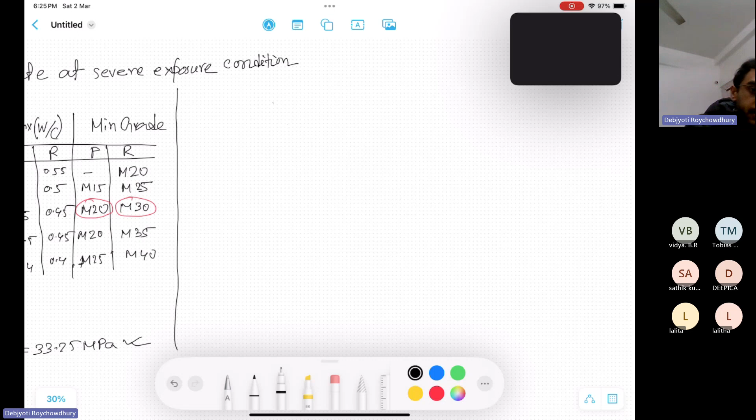So first we will try with the IS method, then we'll explore solving it through the ACI method. That is how I plan. In the beginning, we have to calculate the fly ash content and the new cement content. So first of all, what are the inputs we have? The inputs are 30% fly ash. I think I have to delete this.

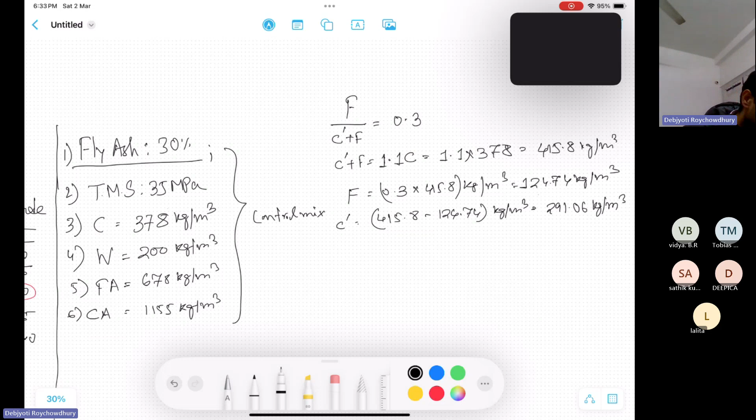So what will be the fly ash content? 0.3 into 415.8 kg per meter cube, which is 124.74 kg per meter cube. Okay, now C dash, the new cement content, what is it? 415.8 minus 124.74 kg per meter cube, which is 291.06 kg per meter cube. So this is the new cement content.

Now the water content. The cement content is there, now we will go for water content. What is the water content? Actually, the IS code mentions the water content based on the maximum size of aggregate. Considering the Indian scenario, MSA is either 20 or 10. So here we'll be going with MSA 20 mm and slump 80 mm as previous. And zone 3, the same zone. If you have seen Professor Bhattacharya's class, it is zone 3 they mentioned.

Then I'll proceed further. So first we got the fly ash content and also the new cement content. Now the water content is already there for the control mix. W is 200. And the slump is 80. Actually, in the previous section I think you have checked for 25 to 50 millimeter slump. Okay, the thing is already there. Yes, I have to tell this thing.

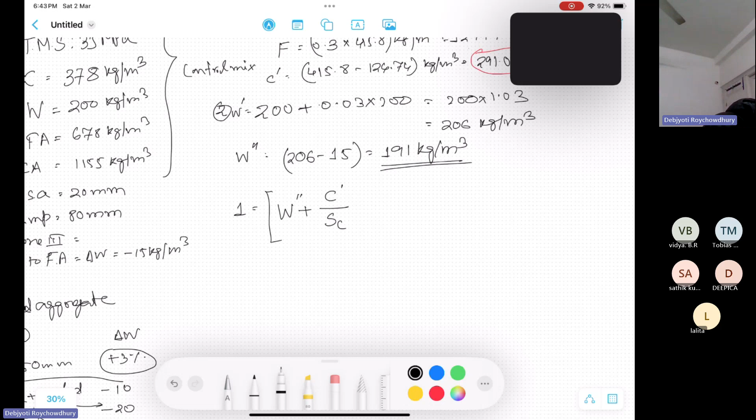So this is where I am. This is conservation of volume. Conservation of volume says that the total volume is 1, so 1 is the water content, W double dash, the corrected or modified water content, plus the modified cement content, C dash, by specific gravity of cement, plus fly ash content. Actually, in this conservation, there is no mention of the air content.

So air content is not included in this equation. So this is the cement content plus this fly ash content, divided by the specific gravity of fly ash, plus fine aggregate. So actually it is zone 3, right? So zone 3, it is about 0.64. I will tell you.

Yes, based on the maximum size of aggregate, what is the zone. So maximum size of aggregate is 10, 20, 40. Okay, same. And it is zone 4, zone 4 very fine, zone 3, zone 2, zone 1, and 0.5. Actually these are all volumes.

This is the volume of coarse aggregate by total aggregate volume. Okay, total aggregate volume. So 0.5, 0.66, 0.75, 0.48, 0.64, 0.73, 0.46, 0.62, 0.71. So 0.44,

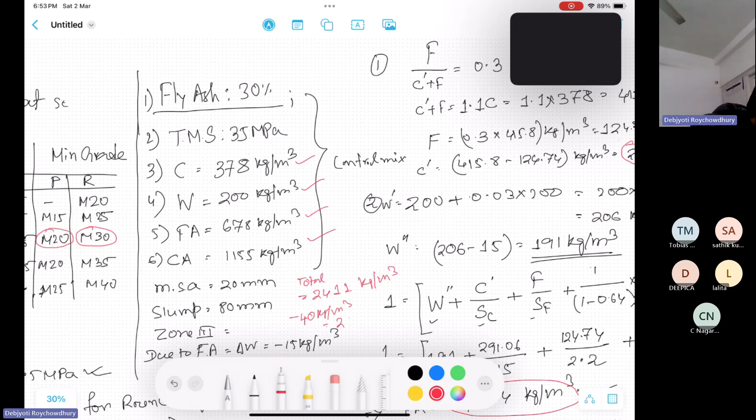So kg per meter cube is bulk density. Now they are saying that due to the addition of fly ash and reduction of water, the bulk density is reduced by 40 kg per meter cube. Okay, reduction in weight density, or bulk density, is by 40 kg per meter cube. It is coming around 2371 kg per meter cube. And you can check it with this, whether it is coming closer or not.

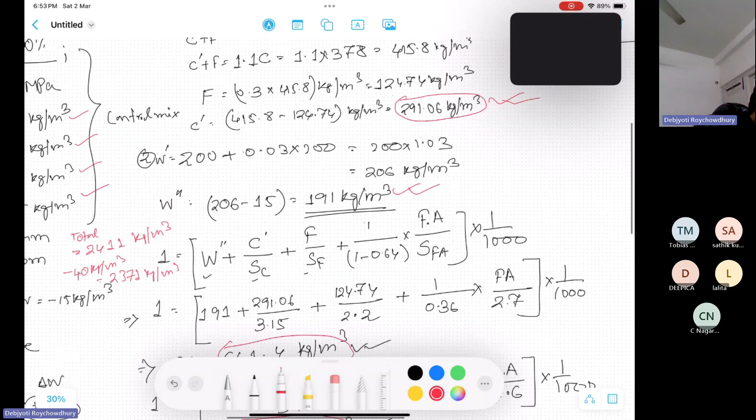So we have this cement content, this water content, and this fly ash content, because fly ash is added here, so fly ash should be included in the calculation. And this fine aggregate content, this coarse aggregate content. So fly ash content 124.74 plus cement content 291.06. This 124.74 is fly ash content, 291.06 is the new cement content. Water content is 191.

Now the fine aggregate content is 641.4, coarse aggregate content 1098.07. If you sum up, it is coming around 2346.27. So it is closest to this value 2371. So basically it is right.

Actually the information is not that compact, so we have to justify whether our calculation is correct or not, because I think this 40 kg per meter cube is not right. Actually this is the correct method of doing the calculation of all the components based on the IS method, because Professor Bhattacharya also stressed on this formula and conservation of volume. From the control mix, 40 kg per meter cube is reduced.

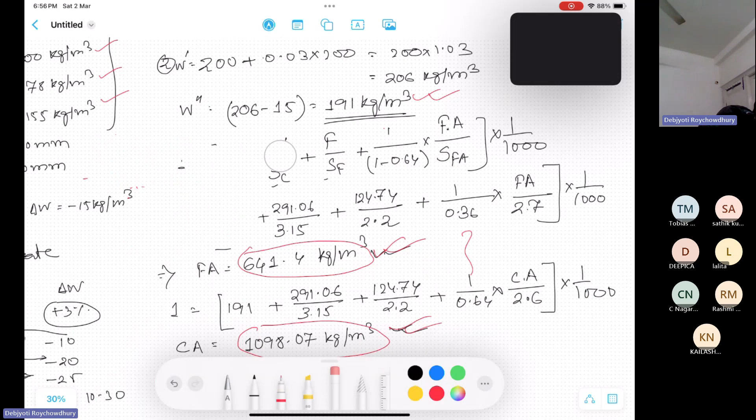Okay, now I'll do it by ACI method. So how would it be? You remember? Yes. What is happening?

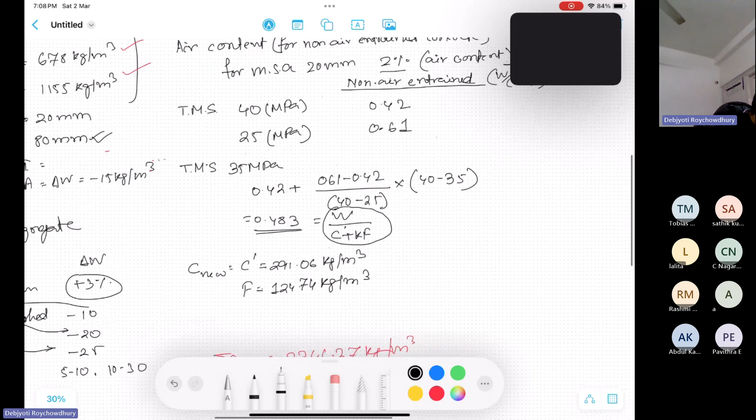So we have already calculated the water, the fly ash content and cement content from our previous calculation. The new cement content C dash is 291.06 kg per meter cube, and fly ash content is 124.74 kg per meter cube. Now the water content is there, so let's check whether it is matching or not.

So from here, water content is 185 by 0.483, so it is 383.02. This is cement plus kF.

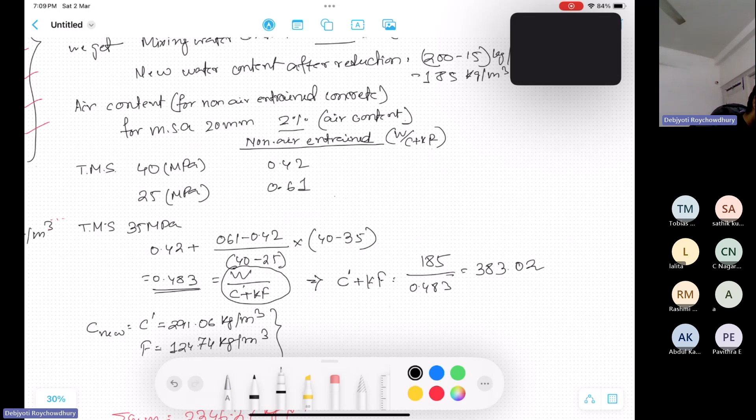So actually we already have the cement and fly ash content. 291.06 plus kF, where the k factor is mentioned as 0.3, so 291.06 plus 0.3 into 124.74, which comes to 328.482. Based on this formula, C plus kF is around 328.482 kg per meter cube.

However, here it is 383 based on the chart, while with the formula we are getting this. So you have to be careful about the methodology, because based on the methodology it can differ. Otherwise, you can simply follow our first calculations, where you can easily find out the fly ash content and all these things.

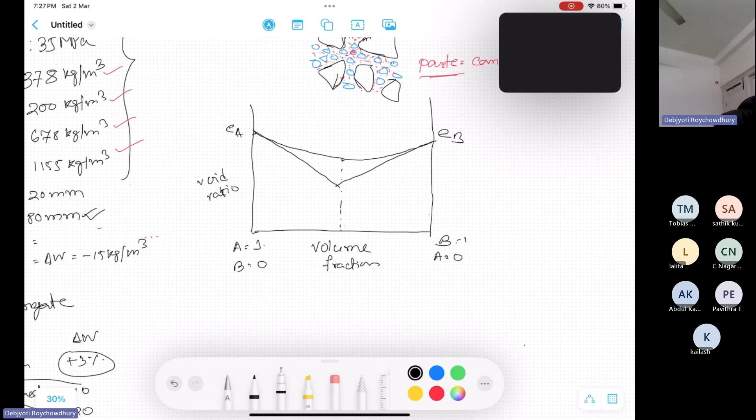So if the graph follows this way, with eA and eB, and there is a smooth transition, actually it can be mathematically calculated. With the smooth transition, at this volume fraction we can get the minimum void content. So this is the volume fraction of both A and B.

Corresponding to this graph, if we draw the packing density, packing density is here and volume fraction is here, A and B, and it's just opposite. So at the optimal volume fraction the void ratio is minimum, and at the same volume fraction the packing density is much more. So actually we can calculate this volume fraction and find out this packing density. The theoretical equations are there based on this to find out the packing density.

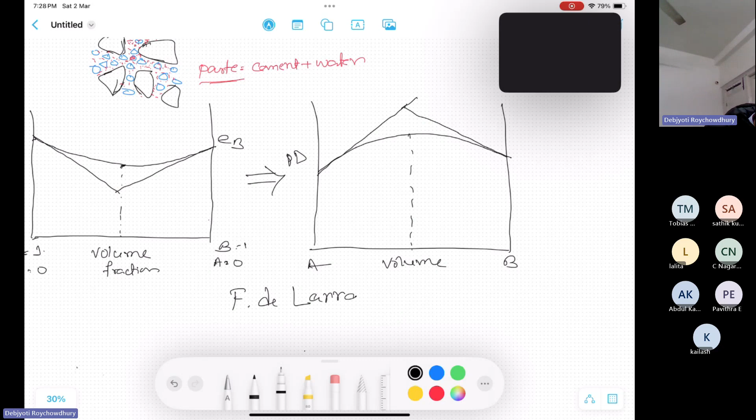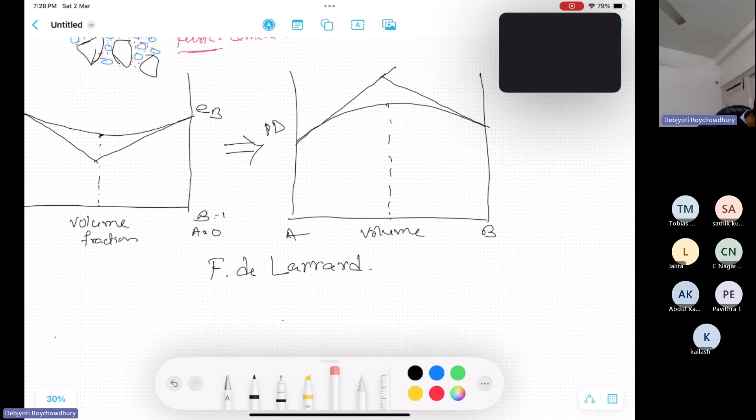One of the theories is led by F. de Larrard. Okay. So actually from a simple experiment you can do this. It is an empirical formula. From a simple experiment you can find out this packing density, which is a packed aggregate mixture in a defined proportion.

So it should be the mass proportion, because if it is a volume proportion, then it is very difficult to maintain the volume. A particular container has one particular volume, and whenever you are batching aggregate by volume and shake the container in a better way, the aggregate gets packed and compacted. However, when another person shakes it, the aggregate doesn't get packed, so it is in a loosened state.

And sometimes you have to trowel it above the top. In the previous cases it doesn't happen, so you will be getting different masses of aggregate for the same volume. So the volume proportion is much more difficult to control. However, the mass proportion you can easily control, because we just weigh the mass. So it is within our reach to control this mass proportion.

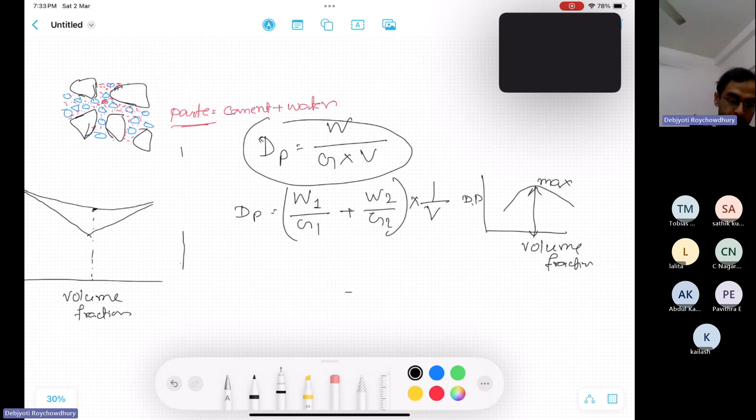Now packing density is done. So you got the maximum packing density, and based on the packing density you will get the minimum void content. So minimum void content is nothing but, yes, based on the packing density.

Yes, so the void will be 1 minus dp max. Actually there is also the effect of density. If you get the void from the density alone, it will be much less. However, the void will be much more because of the wall effect and loosening effect. The wall effect you already know; we discussed it in our previous class.

First of all, the loosening effect: whenever you add fine particles or paste inside the aggregate system, it will disperse the aggregate system. And also due to the wall effect, at the boundary, the fine aggregate arrangement gets disturbed, so dispersion also takes place. It is found that 3 to 10% of dispersion takes place in the cement paste or aggregate system due to the wall effect and the loosening effect.

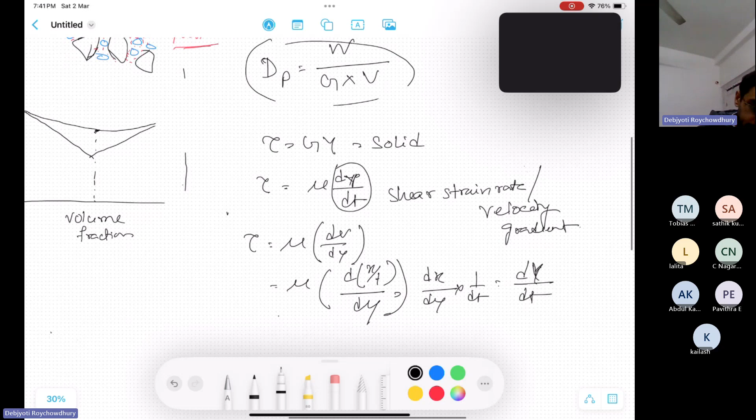Okay, so dx by dy is nothing but shear strain. So it is d gamma by dt. So it is a shear strain. So actually it follows Newton's law. So in the plastic state, the above would happen after applying some certain stress, certain load. This deformation relation will start to follow after we apply some certain load in plastic state.

Okay, so actually in the plastic state, whenever we reach that load intensity, then it will flow like a Newtonian fluid, or it will have the velocity gradient. So if you draw the graph, actually in previous class I have also drawn the graph. So this portion is there, then it started this. Okay, and this is the Newtonian. This is Bingham fluid, Bingham.

So actually from here to here, it is a solid state, so there is no deformation. After that, this tau is there. After particular shear deformation and rate of shear deformation, after a particular loading rate, it will try to behave like a fluid. So there are certain points: 1 to 2, 2 to 3, 3 to 4, and in 3 to 4 it will completely behave like a fluid. However, in 0 to 1, it will be like a solid, there will be no flow.

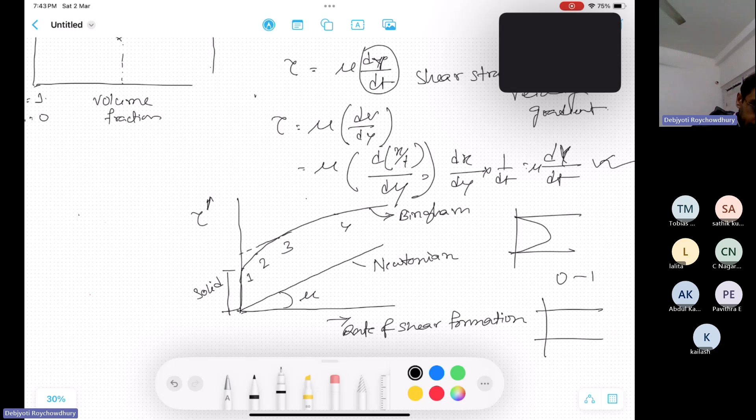In 1 to 2 there will be little flow; however, there is sticking nature. In 2 to 3 the flow is going to be mobilized, and in 3 to 4 fluid flow is there and follows a gradient. That gradient is mu, and this mu is nothing but the shear viscosity. This is mu, and this is called the yield shear strength.

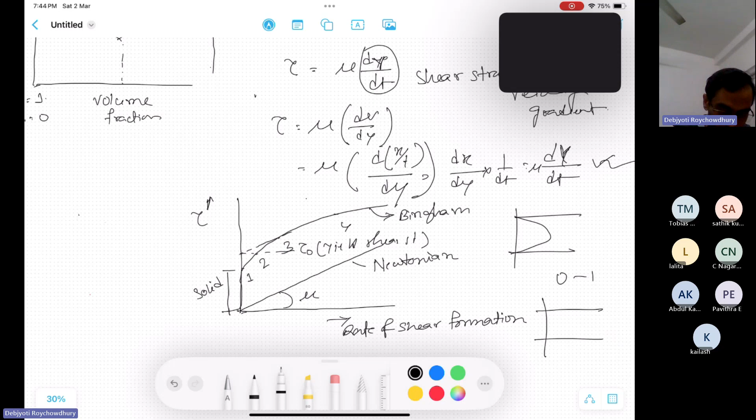So concrete at plastic state behaves like Bingham, because at the plastic state we have to apply some load, then it will deform. So it follows the Bingham theory. Addition of water increases the shear strain. Water reducing agents also: some increase the plastic viscosity, some decrease the plastic viscosity, and reduce the yield stress also. There are some points I discuss.

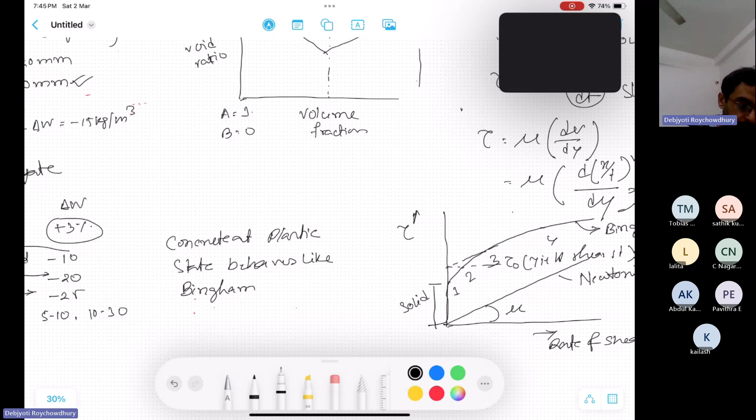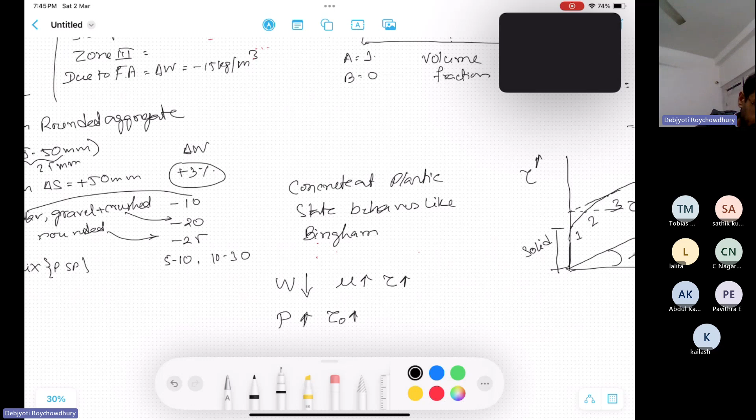So if water content is less, then the viscosity is increased, and it increases tau also. The more paste there is, the yield shear stress decreases, tau naught will get decreased. And with lower paste, viscosity will get reduced, and yield shear strength will increase.

I think it will decrease. Yes, shear strength will decrease, and with lower paste, yield shear stress will increase. Yes, for more paste, mu also gets increased. Actually, if you use more cement paste, the viscosity will get increased. It will give cohesion. However, the shear strength will get reduced, so it will have an adverse effect. In terms of resistance, it may not be the right choice.

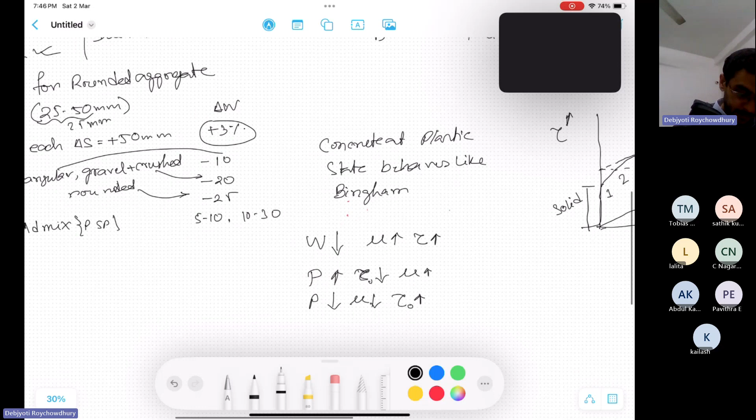Okay, so now for the viscosity, there's also some formula, and it is not that descriptive. However, you have to remember this for your own exam purpose. Okay, sorry.

Okay, now this paste forms the matrix. This paste means cement plus water forms the matrix, and in the matrix the aggregate system is there, and it lubricates this aggregate system. We can find out there's a dispersion of 3 to 10%, and there's also the wall effect and loosening effect coming into picture because of this lubrication. So this is the degree of dispersion. Degree of dispersion is 3 to 10%. Remember it.

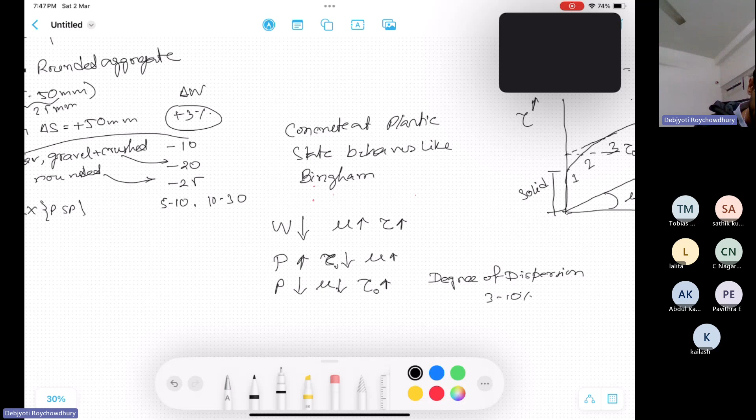Now, decreasing the volume of the matrix reduces the dispersion. The volume matrix, the matrix is the paste. So decreasing the volume of the matrix reduces the dispersion and increases the particle interference. It's obvious that whenever you decrease the volume of the matrix, particles will come closer to each other, interference will take place, and the stiffness of the concrete will increase. However, there is some limit to it.

Normal consistency for the cement paste is 32%, and for flowable concrete it is 37 or 38%. So self-compacting concrete also has more than the normal consistency in water content. Below a level, lowering the volume of the matrix would result in harsh concrete and make the concrete segregate. So there should be some level to which you lower the volume of the matrix, because too much lowering will increase the harshness and also cause segregation.

Now, increase in matrix volume improves the concrete consistency. If the matrix volume is increased, the water content also increases. So the matrix should have adequate consistency. A low water cement ratio matrix may cause the dispersion but cannot hold the aggregate together. Whenever the water cement ratio in the matrix is low, the aggregate can't be held together, because you can't keep on lowering the matrix volume, as you have to bind all the aggregate together, so stiffness will get reduced and the aggregate gets separated.

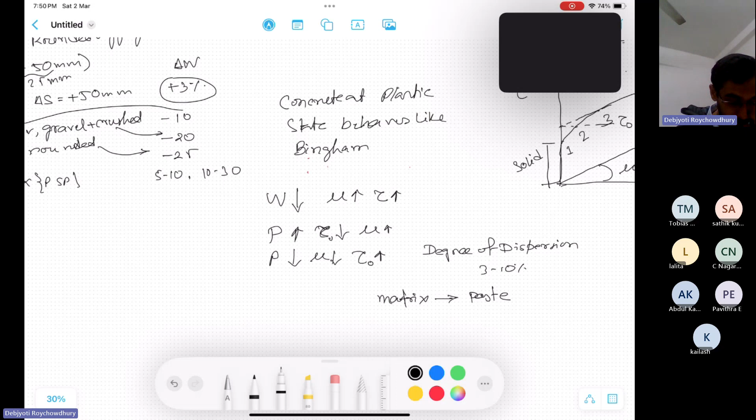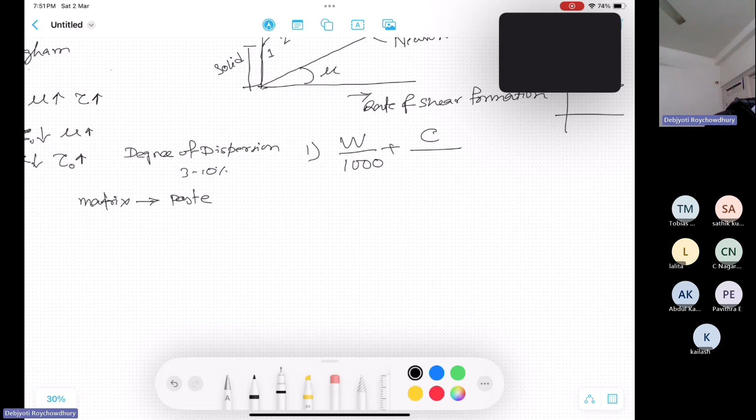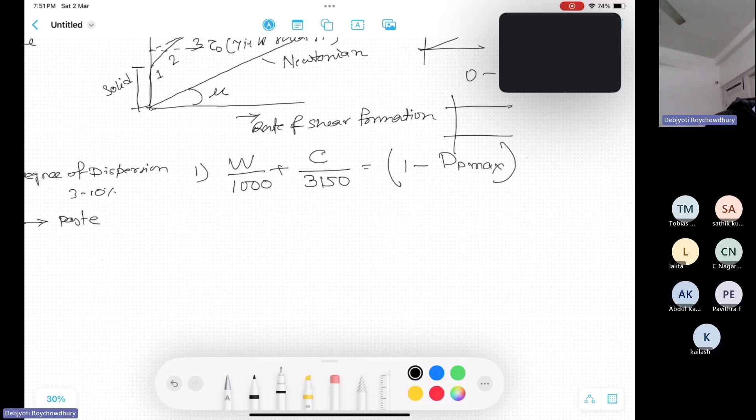Now there are several formulas which help us find the aggregate content, if you are using a mixture of two or three types of aggregate. Let me find the formula quickly. This water content is W by 1000; these are all volumes. The cement is C by 3150, and 1 minus dp max, the packing, into 1.1. That is one formula. The other formula is water cement ratio, or W by C plus kF, equal to the water cement ratio from durability consideration.

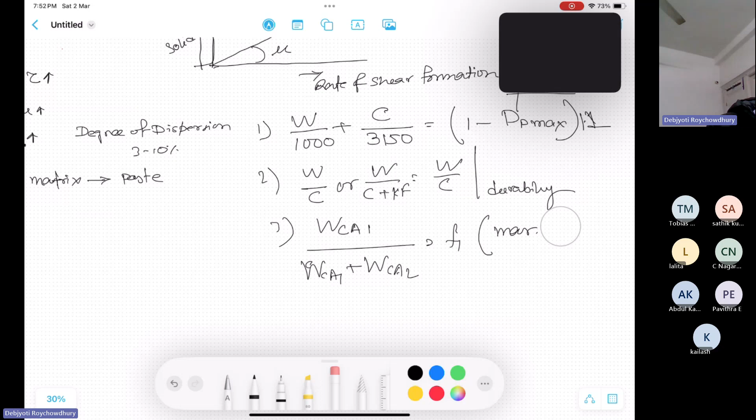The third equation is for the aggregates, where two or three aggregates are there: coarse aggregate 1 volume fraction plus coarse aggregate 2 volume fraction. Actually this is mass fraction, not volume fraction. If two coarse aggregates and fine aggregate are there, we get WCA1 by GCA1. I already told you a few hours back how to find this density and the packing density. So WCA2 by GCA2 plus WFA by GFA, equal to 1000 into dp max, the packing density. These are all volumes.

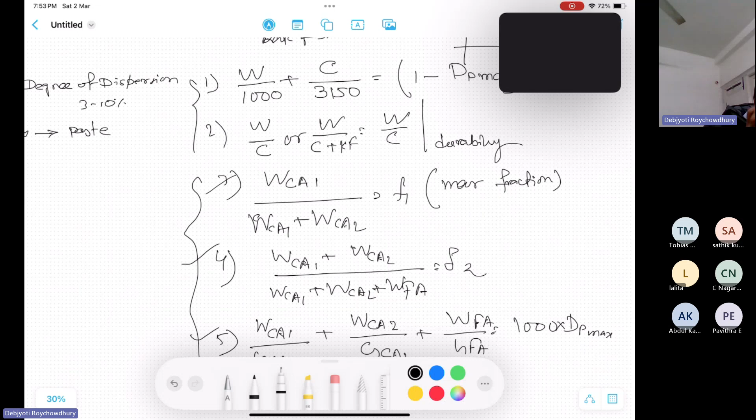So with these three formulas we can easily find WCA1, WCA2 and fine aggregate: coarse aggregate type 1, coarse aggregate type 2, and fine aggregate. These three equations guide us, and the other two equations give us the water and cement content. Now the mix proportion obtained would have the least flow properties for the given water content. To increase the slump, add the maximum possible dosage of compatible water reducing agent determined by the mini slump test.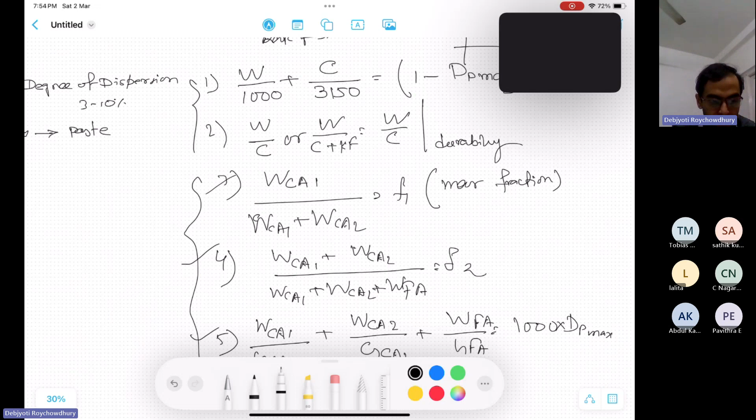So in the mini slump test, there is this cone, with 38 mm here, 50 mm here, this is the mini slump cone, 50 mm, and this is 19 mm.

Okay, and this is just to check the flowability. We put the concrete inside and just lift it up, see how it's getting spread, and we can find out. So with the superplasticizer, we are actually finding out the flowability if we add different types of superplasticizer, and the graphs are also there.

So these are superplasticizer 1, 2, 3. Okay, superplasticizer 3. Actually this graph is like flow: here flow is there and dosage is there. At a particular dosage it gives the maximum amount.

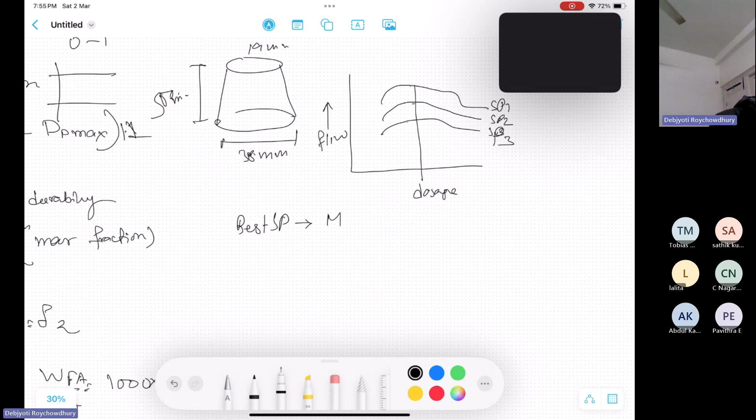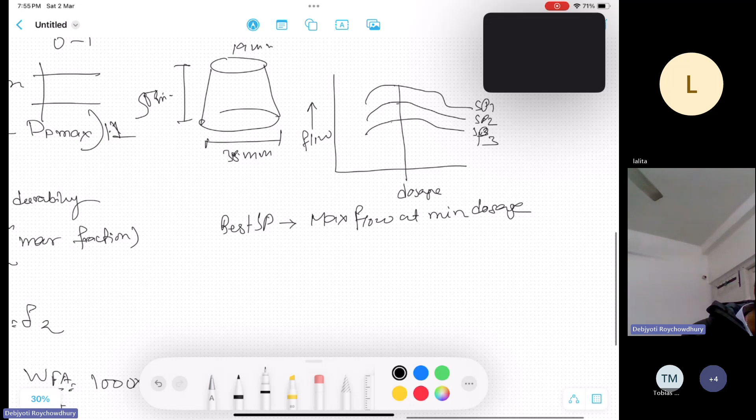So the best choice of plasticizer is that the best plasticizer gives maximum flow at minimum dosage. Okay, maximum flow at minimum dosage. So these are the ways we can find out the flowability.

Now the lecture covers batching and mixing, because mixing is also very important, and batching is nothing but the process of measurement: how we measure the specified quantities of cement, aggregate, water and admixture. There is volumetric batching and weight batching. Volumetric batching is not desirable because it is very difficult to control the volume. However, weight batching is largely adopted in the Indian scenario.

There are also plant types: cyclic, continuous, and manual. For the accuracy of weight batching, IS 456 recommends plus minus 2% for the quantity of cement, and plus minus 3% for the quantity of aggregate, water and admixture. Some tolerances are also mentioned, for cement and other cementitious material, plus minus 1.

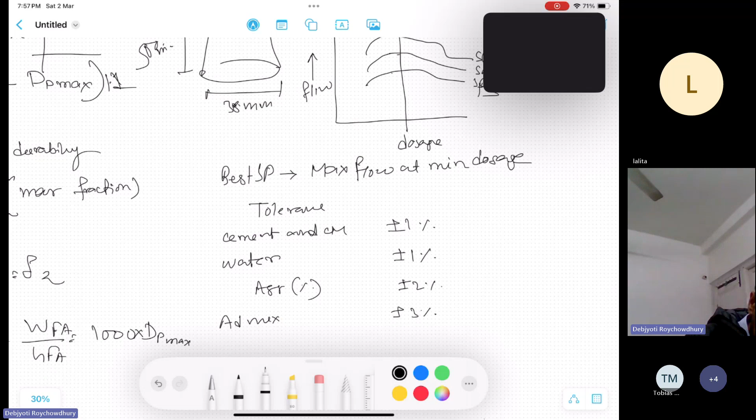Tolerances are there. Cement and other cementitious materials, plus minus 1%. Water, by volume or weight, plus minus 1%. Aggregate is plus minus 2%. Admixture is plus minus 3%. Now this tolerance can be calculated this way: 0.3 times scale capacity by weight tolerance.

So actually, if the weighing system has 1000 kg capacity, the tolerance can be calculated based on the material; for cement it is 1%. So based on the tolerance type, we can calculate the overall tolerance for that particular plant and material.

Uniform concrete exhibits less variation, and tolerance means the variation. When we are obtaining 37 megapascal concrete, the variation should be minimum. If the variation is plus minus 2, we are getting 35 or 39, the variation is in range. In another batch, if we are getting variations of plus minus 5, 32 to 42, then the variation is much more, so the uniformity is not there.

So this plus minus 2 variation is much less, and that is desirable, based on our criteria of the desired strength of concrete. Variation depends on the variation in properties. For example, if you keep increasing the cement content, water also increases, errors in cement and water measurement also come, and the strength varies from batch to batch. Quality means less variation. Proper batching ensures better quality.

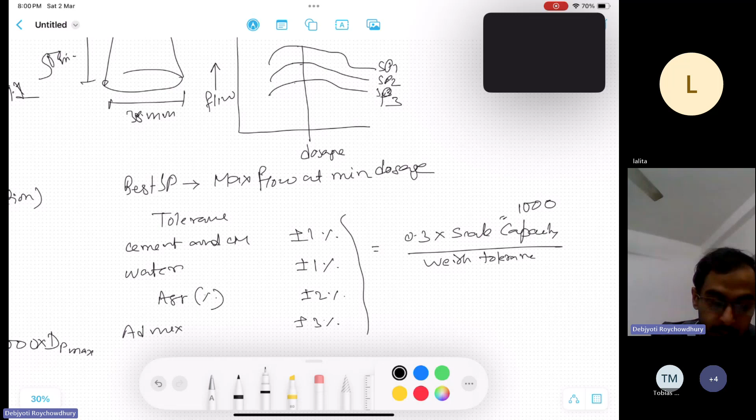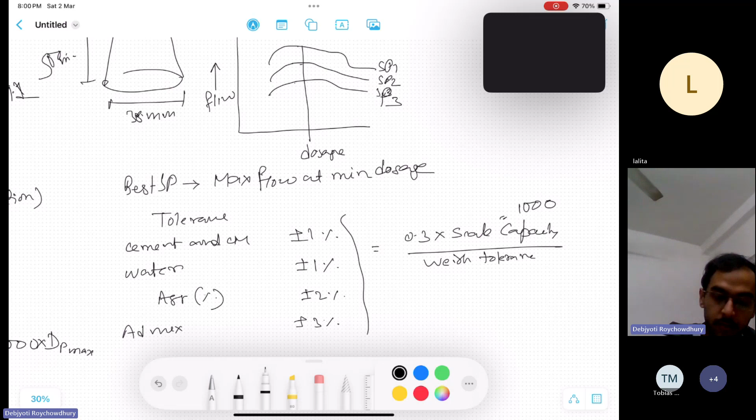Now consider the mixing time. The mixing time should usually be short, depends on slump, and is useful in low slump pavement concrete; for low slump pavement concrete the mixing time should be less. In the IS code it is mentioned 1 minute for 0.75 meter cube of concrete, and 0.25 minutes for each addition of 0.75 meter cube of concrete. Okay, so I'll quickly write this here.

This: 1 minute for 0.75 meter cube concrete, and plus 0.25 minutes will be added. It will be added with 0.25 minute for each additional 0.75 meter cube capacity.

So uniformity states that tests of the sample of fresh concrete collected from the mixer at different stages of the discharge from the batching plant. So actually from the batching plant, whenever the hose is there and the discharge is coming, you have to take when the first discharge is coming. This IS code, IS 456, mentions 2 minute mixing time. After 2 minute mixing time, the discharge is coming.

Okay, so take the first 15% of the 2 minutes, means 120 seconds. So that's 15%, 18 seconds, and last 18 seconds, because the variations can come. So we use it that way. First 18 seconds you collect the samples, you find out the concrete strength and all the other properties, and last 18 seconds you collect the samples and find out the strength and also the aggregate content by charging the jet water, and find out how much the aggregate content is. So you can find whether the uniformity is maintained or not.

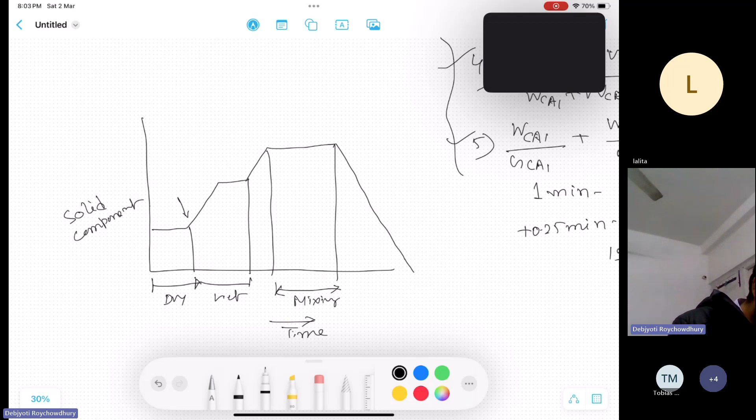So there is some chart. Sorry, this chart is there. Okay, so actually this is the mixing time. This is the wet mixing time, this is the dry mixing, and this is the solid component content. So here we charge it, and we add some water, and here we also add some water in this section. This is the loading period, and after here we are not adding anything. So this is the pure mixing time, and this is the discharge period.

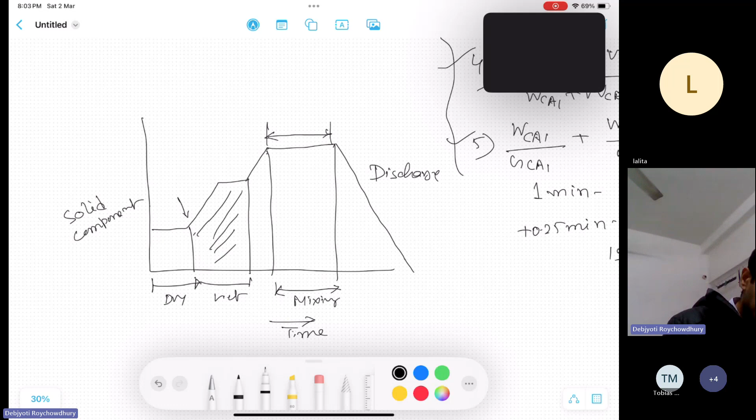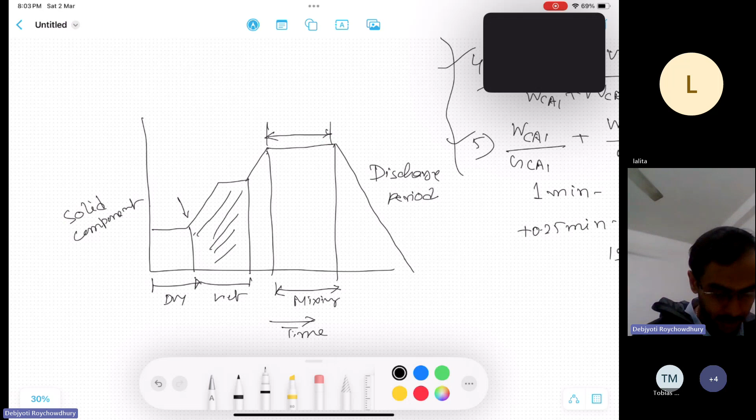Now there is little difference with IS 4925-1968, because they told that mixing time for each batch of the material, period of all mixing water shall be introduced before 1/4 mixing time elapsed, shall be 1.5 minute for 2 meter cube concrete, 2 minute for 3 meter cube concrete, 2.5 minute for 4 meter cube concrete. So these are the guidelines based on IS 4925-1968.

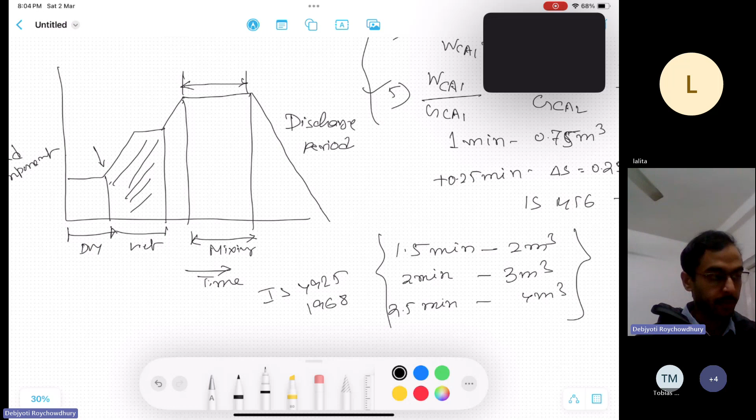Increasing the mixing time results in more uniform distribution of hydrated products, and higher compressive strength may result. However, if you keep on extending the mixing process, then with the rolling action, because there is some tilting device in the machine where the materials get mixed up, due to the crushing and abrasion the aggregate gets crushed and the fine aggregate becomes more, and it may not give you the desired strength. So prolonged mixing may not increase the strength proportionally and may result in a decrease in some cases. So you have to be careful.

And excessive mixing leads to segregation for the lean concrete, means concrete that is not designed in a specialized or desired way. So for the lean concrete, it will segregate. So for this mixing, the tilting type mixer is not desired, however the bottom discharge mixer is desired. Whenever there is a tilting type, the aggregate has a tendency to come out first, then later the paste will come. However in the bottom discharge mixer, this problem doesn't exist.

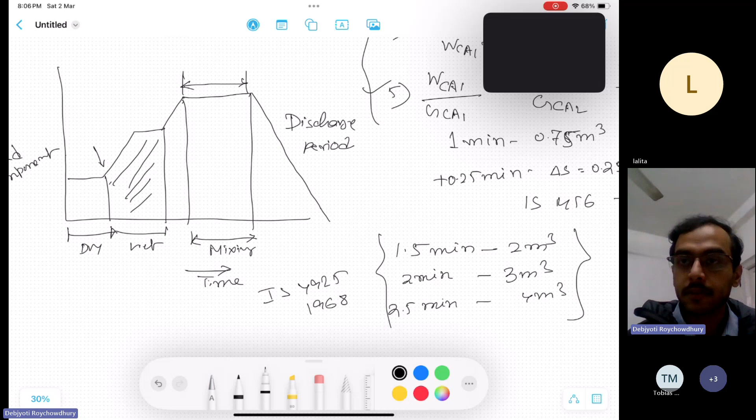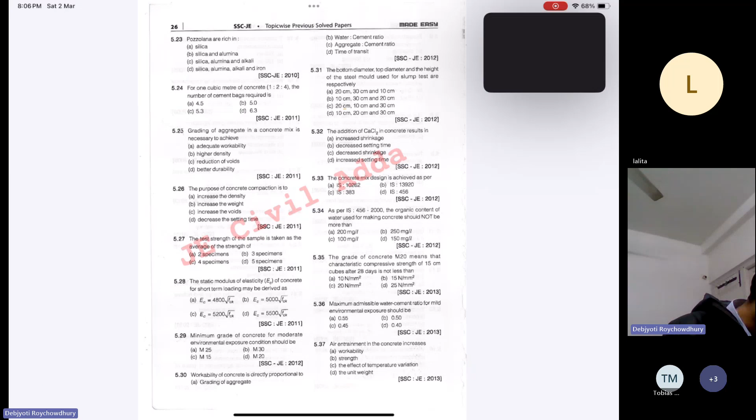So this much, and I think we can discuss a few questions that I promised. Actually we have already covered till question 31. Yes, 31 is as per

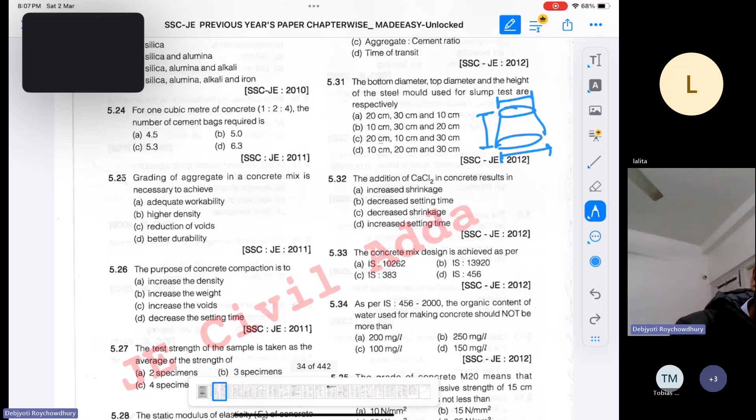IS 7320-1974, the internal dimension of the mold of the slump test. It is not a mini slump, normal slump test. Bottom dia is 200 mm. Top dia is 100 mm. Actually this is the slump cone: this is the top dia, this is the bottom dia, this is the height. Height is 300, bottom is 200, top is 100.

So its answer is C. Now, addition of calcium chloride in the concrete results in what? This is an accelerator. Accelerator means setting time decreases. Decrease the setting time. It should be B.

IS 456-2000, the organic content of the water used for making concrete should not be more than what? Actually IS 456 mentioned the organic content. If you check it, this organic content, I am just writing here. Organic content is 200 milligram per liter, 200 mg per L. Inorganic content, this is 3000, same unit.

Sulfates is 400, and chlorides is 2000, or suspended matter, it is around 2000. Okay, so for organic it is 200. Okay, so option A.

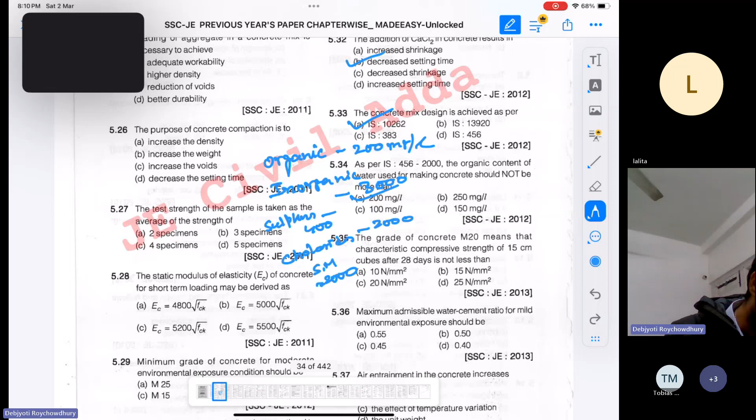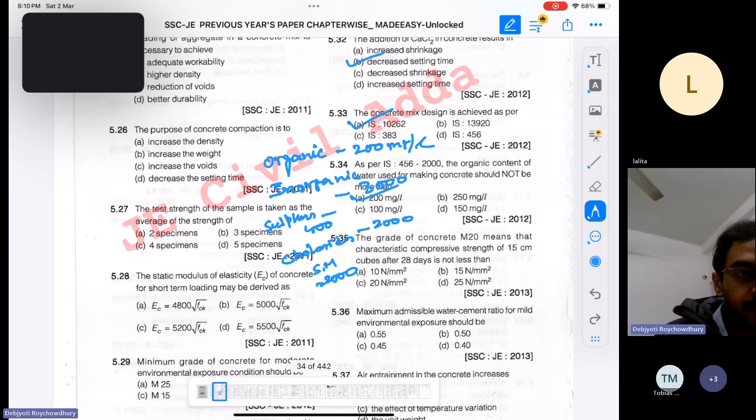Okay, the grade M20 of concrete means the characteristic compressive strength of 15 centimeter cube after 28 days should not be less than 20. So it is 20, okay. Yes, it is 20. So maximum admissible water cement ratio for the mild exposure condition.

Maximum water cement ratio, I think 0.4? We have already discussed today what is the maximum water cement ratio for the mild environment condition. Maximum water cement ratio is 0.55 or 0.6. So 0.55 is the reinforced concrete. 0.6 is the mild plain concrete. Okay, plain concrete. So it is option A.

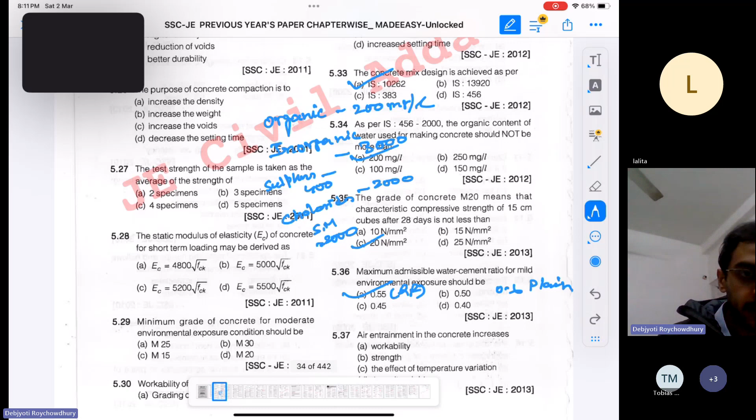Sorry, what is this? I think for the mild condition, right? They are saying the maximum admissible water cement ratio for the mild exposure condition. Yes, mild exposure condition it is 0.6, right? A, 0.55. Yes, mild exposure condition it is 0.55. Yes, I think they have written something wrong. No, it is A only.

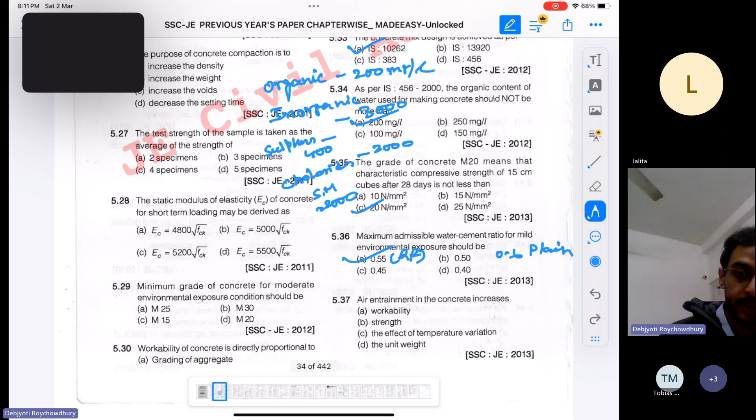So air entrainment in concrete increases the workability. Yes, it should be the workability, but it does decrease the strength. Okay, now which of the following acts as a retarder in the concrete? Calcium lignosulfonate, calcium chloride, aluminium powder. Calcium lignosulfonate is the most probable answer.

So actually, a few retarders are there: gypsum is there. Gypsum reduces the flash setting property. Sugar, so these are the retarders. Okay, sugar and calcium lignosulfonate. So this is the question. Identify the wrong statement.

The bulking of the sand can go up to 40%. Bulking of the sand is maximum at 4.6% moisture content. Bulking of sand is considered in weight batching. Bulking of sand occurs due to free moisture film formation over the sand grain. Okay, these three are right because these three are relevant.

However, the bulking is considered in weight batching? Bulking is only a volume batching thing. Whenever volume batching is there, bulking comes into the picture. Let's see, so it is C. Yes, the answer is C.

39. Okay. So the coarse sand has the fineness modulus in the range of, I think, 2.9 to 3.2. Fine is 2.2 to 2.6. Medium is 2.6 to 2.9. Coarse fine aggregate is 2.9 to 3.2. Okay, so it's D.

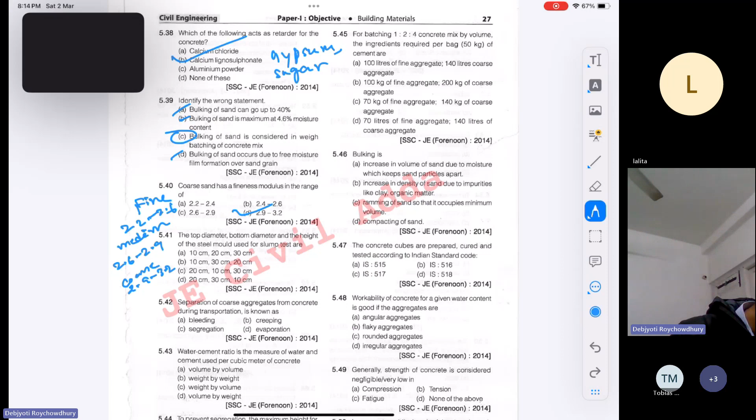The top and bottom dia of the cylinder in the slump test is already discussed. Separation of the coarse aggregate during transportation is segregation. Water cement ratio is a measure of water and cement by weight. Yes, it is weight by weight, the ratio of the weight of the water and weight of the cement in the concrete mix. So it is B.

Okay, so to prevent segregation, maximum height for placing concrete. We can't throw the concrete beyond a certain height, otherwise it will get segregated. So as per IS 456 2000, the maximum permissible free fall of the concrete is 1.5 meter.